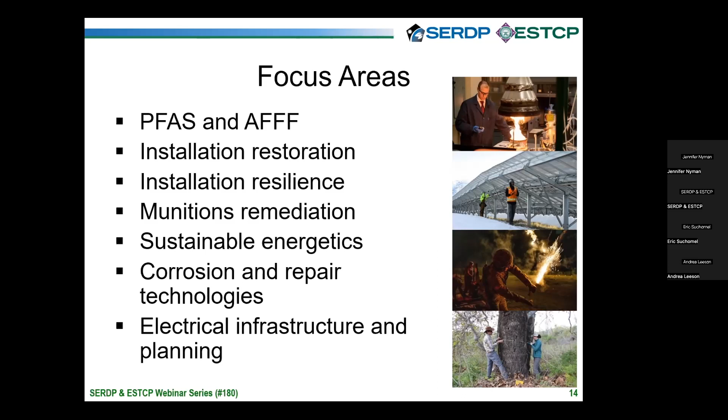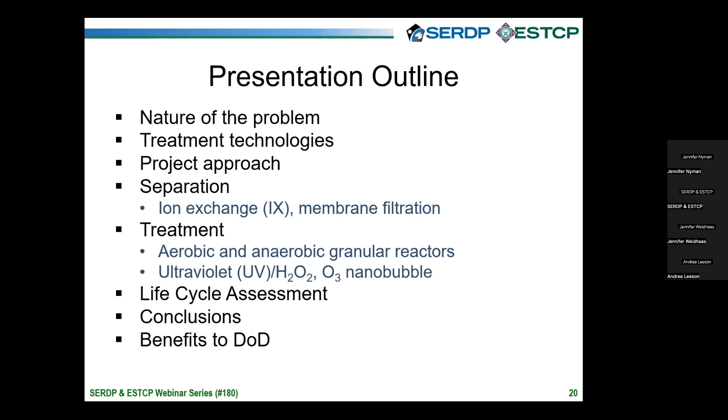And then I'll wrap that up by looking at the environmental impacts from these technologies by using a life cycle assessment. It's one thing to be in a laboratory and developing these really cool projects and proving it out at a pilot scale, but it really comes down to what is the cost of all those technologies compared to the baseline treatment that's currently being used, and what is the true environmental impact long-term from different technologies that you're selecting. Okay, so let's talk first about the nature of the problem.

Munitions wastewater can have a variety of different munitions in it, such as new insensitive munitions, such as DNAN, NTO, or nitroguanidine, in addition to what are considered to be legacy munitions, such as RDX or others. They can be in relatively high concentrations, up to or even half the solubility of some of these compounds. So for example, NTO is highlighted here because it is very highly soluble and also contributes a bit of issue with respect to pH.

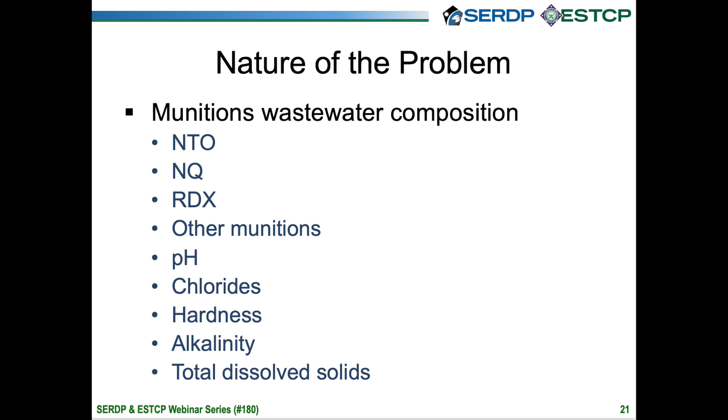So if you have a high NTO concentration in your wastewater, your pH is actually going to be down around 3 or 4. In addition, there is water that might be added to the system that comes from a domestic source. So if that domestic source, say river water or groundwater, contains high hardness or calcium or magnesium, that might foul some of your downstream treatment processes. Okay, so high concentrations of NTO is a problem.

On this next slide, I want to emphasize what some of the treatment goals might be. This is a picture from the Iowa Army Ammunition Plant NPDES permit. And I've highlighted in the lower right the concentrations of NTO that are allowed to be released on this version of the permit that goes through 2025. You'll note here that that facility is allowed to release only 1.1 milligrams per liter. So influent concentrations might be, say, 16,000 milligrams per liter, and you have to get it down to 1.1.

The other challenge that faces facilities when trying to deal with these wastewaters are the volumes of water that need to be treated. In some cases, there might be a certain batch that has some insensitive munitions as well as RDX. And then say 6 months or a year later, there may be a different batch of munitions that's being produced with a completely different constituent makeup. In addition, the volume might vary from no wastewater up to say a few tens of thousands of liters that need to be treated. So very variable influent that is kind of an exciting challenge for an environmental engineer to design, but from an operational standpoint might be a bit of a headache.

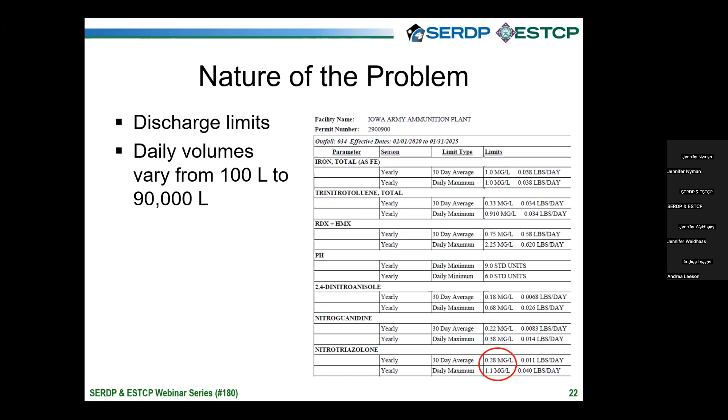Okay, so in thinking about how we would select a technology, given all those constraints that I just mentioned, here is some of the thought process that you might go through in selecting a treatment train. So if we start on the left-hand side of this diagram, I've listed out some of the available treatment technologies categorized by, say, what would be considered a mechanical, physical, chemical, or a biological process. This is not an exhaustive list of all the types of technologies that are available, but I present some here in each category as examples.

So under mechanical, you might be, for instance, trying to separate out one particular constituent that would slow down, say, a biological treatment process later on. So that's one of the examples and why we included both ion exchange and reverse osmosis in our study. You then might have a physical chemical process, say photolysis or ozonation, where you're actually now trying to target treatment of the separated munition compounds or other constituents that you're concerned about.

Okay, so after you've selected a variety of technologies, you then need to screen them out and decide, yes, this is an appropriate one that I want to proceed with at lab or pilot scale. Some of the considerations you might have are shown in the upper right, where you're looking at these selection and design criteria. So one of the key characteristics is how clean does that water need to be before I can release it to my receiving water or wherever it ends up. It might even be reused within the facility, as some facilities are interested in reducing their overall water footprint, right? So whatever that level is, whether it's an NPDES limit or other standard, that's probably one of your first criteria you're going to consider.

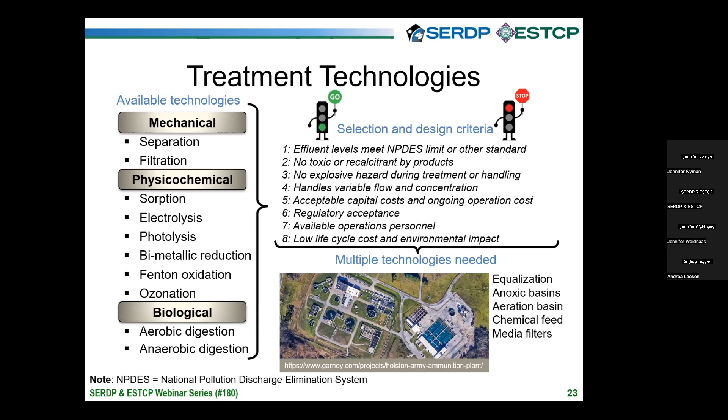Okay, so let's talk specifically about our project and what we ended up studying. This flow diagram is confusing, but I'll walk you through it. It's basically the influent comes in the orange box on the left hand, might have any one of these munition constituents in addition to things like perchlorate or nitrate, if those are also included in whatever formulation that facility is producing that day, or potentially even demilitarization wastewater.

And then the effluent in the blue box on the right-hand side is our goal, right? We want to be able to either discharge the treated wastewater straight to a receiving stream, or it may want to be reused within the facility. In the boxes are the different technologies that we studied. So we started by looking at different anion exchange processes, in particular because NTO was of concern to us because it may be in very high concentrations.

And we also looked at a membrane filtration system to separate out, say, the larger compounds such as RDX and DNAN from the smaller permeate compounds such as NQ or nitrate and perchlorate. And we then had various biological and chemical treatment processes that we evaluated for either the brine from the ion exchange backwash or the flow through or the permeate or retentate from the membrane. Okay, so let's get started.

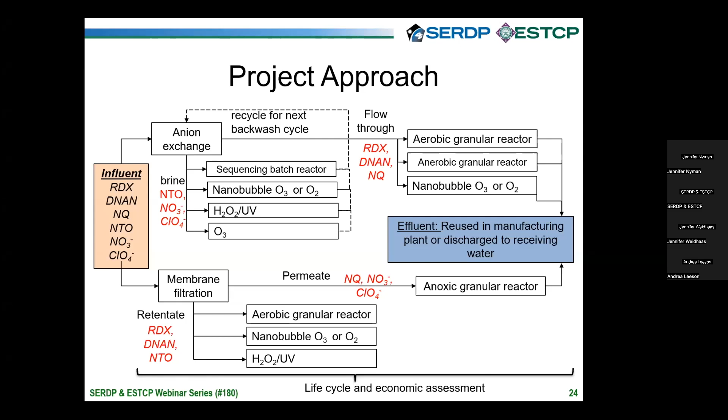I have just a few slides on each one of these technologies. We have a series of papers that have been published. I encourage you to email me or find it through Google Scholar, and I'd be happy to share those papers with you if you need more details.

So some highlights. Let's talk about the ion exchange technology. The argument for this being that NTO is an anion in most systems. It will be in very high concentration and could foul later biological treatment. So we were evaluating whether we could remove it from the wastewater and separate it from the other munitions such as DNAN, NQ, and RDX.

So the plot on the lower left shows you some batch studies that were conducted with 4 different ion exchange resins. These resins were selected because they are commercially available, they're used for water treatment, and they're also specific for nitrate or perchlorate removal. What we see here in the graph on the lower left is relative concentrations. A 1 being there was no removal of this munition in the ion exchange column, and a 0 being it was removed 100%. Oh, I'm sorry, the inverse of that.

So let's look at NTO on the diamonds in the second plot from the right on the lower left. What we see here is that NTO was completely removed in this ion exchange resin and all the resins we tested, whereas NQ was not removed at all. DNAN was variably removed, and some amount of RDX was exchanged on this resin.

We also see that in the plot on the lower right, some of the resins had a higher adsorption capacity for NTO than others. So for instance, the Purolite A532E won out in most of our systems and was used in our column studies.

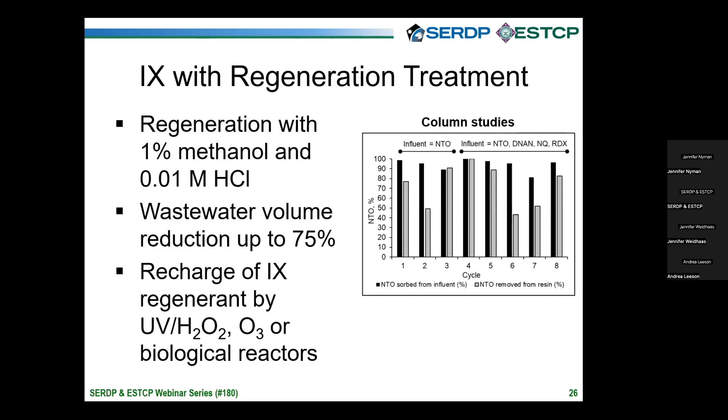So we're able to repeatedly load that ion exchange column and remove the NTO for further treatment. And additionally, we're able to reduce the overall volume of wastewater that needs to be treated that contains NTO by about 75%. But the permeate through the ion exchange column could contain, for instance, DNAN, NQ, and RDX, which needs to go to further treatment. And then the NTO that is removed from the wastewater and now in a concentrated solution also needs treatment. So some options available for treatment of both of those streams are in the next few slides here.

For IX brine regeneration, the plot on the upper left shows you the flow diagram. I have munitions wastewater coming in, which may require a pre-filter membrane if there are, let's say, some crystals of the munitions that have precipitated out as it flows through the treatment system because it's very high concentration. And then it would go through an ion exchange column, would be loaded with NTO within the ion exchange column, and then I'd need to regenerate it. So then treatment of that regenerate is what we're focused on here.

Some of the different technologies we explored for treatment of NTO in a brine solution are shown in the figure on the lower right. Again, we're looking at relative NTO removals. And so we see that certainly both a macro scale ozone and what's called a nanoscale ozone microbubbles are both very efficient at removing NTO when I have a relatively clean water, such as deionized water.

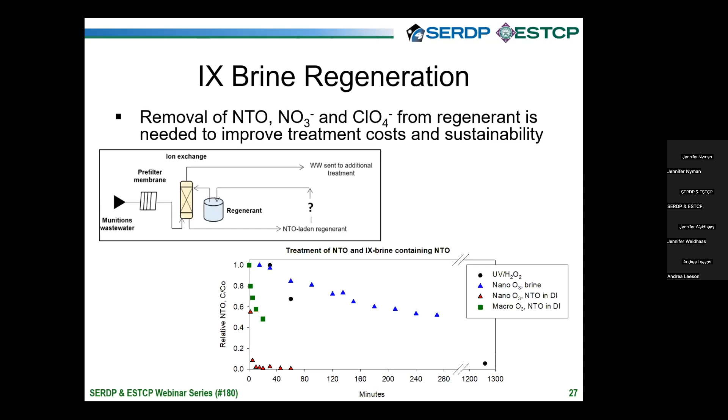When I add in things which might be present in the brine, such as that methanol, or I am adding in some complex salt solution for the regeneration, my degradation of NTO decreases, but I'm still seeing pretty effective removal of NTO. So I could theoretically reuse my ion exchange brine for regeneration of that column multiple times, which reduces the cost of the system and improves the sustainability of the system.

And so what were the conditions that we tested? Well, we tested influent wastewater that was a variety of pHs. So wastewater could be a pH of 3, could be a pH of 7, or maybe a little higher than that. And then sometimes you might have co or counter ions also present in that wastewater. So we did a series of tests where we added calcium and magnesium and some other chlorides, for instance, and nitrate to see how that affected the rejection. So NQ, when you threw in some very complex wastewater, we started to see reduced rejection in that system.

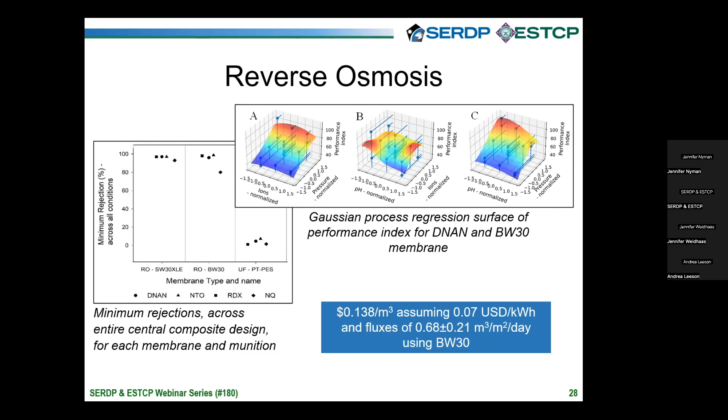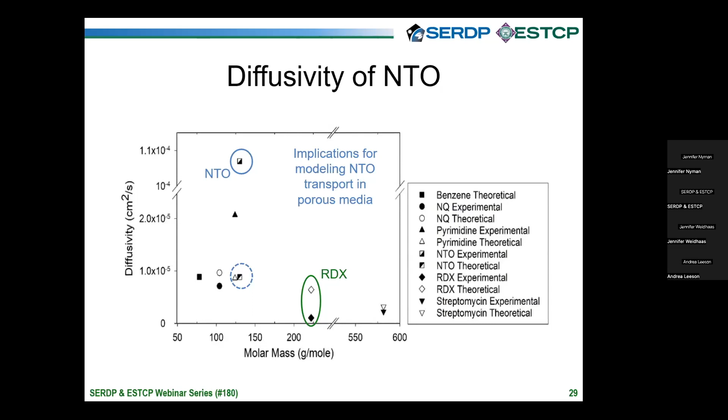Okay, one other quick thing I just want to mention, this is NTO and RDX diffusivity parameters. So NTO in particular, I want to point out here, because this does have modeling importance for those of you looking at groundwater transport of NTO. Hopefully it's not in the groundwater, but if it is, like we've seen for RDX, we want to be able to estimate the flow and transport of that. So we did some stop flow studies looking at NTO and other munition constituents.

And what we found was if you're using theoretical models to estimate the diffusivity of NTO, you might underestimate the diffusion of NTO through porous media, whereas our experimental results showed a much higher, order of magnitude higher diffusivity of NTO. So a cautionary tale for those modelers out there.

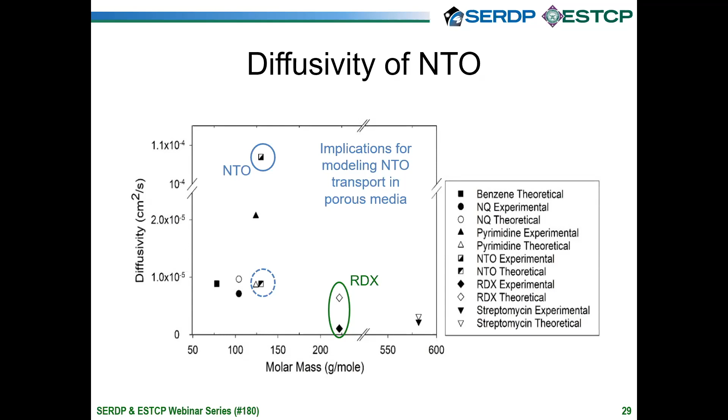Again, this is published. I'd be happy to provide the paper to anyone who is interested in knowing more details about it. Okay, let's talk briefly about the biological treatment systems, and then we'll look at the life cycle assessments for putting all these together.

Okay, so what's a granular reactor? This is sort of a new model of biological treatment systems. Most biological treatment systems are either a suspended single cell system, or you might have a floc reactor, similar to most municipal wastewater treatment plants, where there's a few bacteria that are sort of accumulated together. There's a little bit of sticky extracellular stuff that holds them together and allows them to settle relatively quickly.

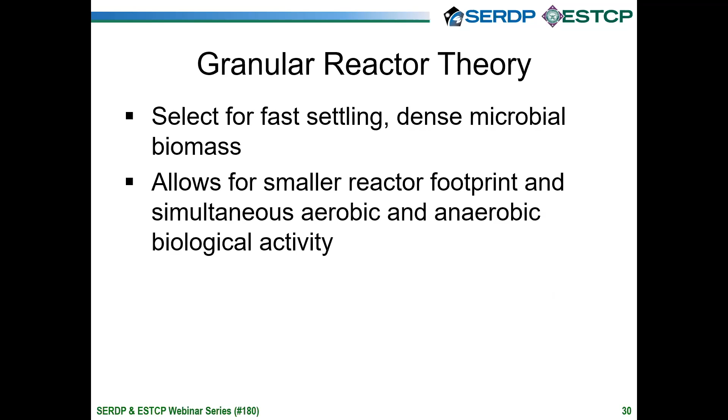Whereas a granular reactor is a very tight bundle of dense microbial biomass that allows for very rapid settling and also allows for both aerobic and anaerobic or anoxic treatment within one system. And because it settles quickly, it's a smaller reactor footprint and potentially more cost effective.

Okay, so an example of what the granules might look like are shown in the diagram on the left-hand side. So, the picture on the left-hand side shows two graduated cylinders. The one on the left-hand side is a standard activated sludge floc-based system that you might see in a municipal or domestic wastewater treatment system. They settle, but they take maybe an hour, half an hour to reach settling.

In contrast, the graduated cylinder on the right-hand side of that figure shows you very large granules that are on the centimeter size. These things settle extremely quickly and are very dense. So the theory is, in the figure on the lower right, that you would see, for instance, NTO or nitrate on the exterior that might be treated aerobically if I'm pumping air through the system to keep the floc suspended.

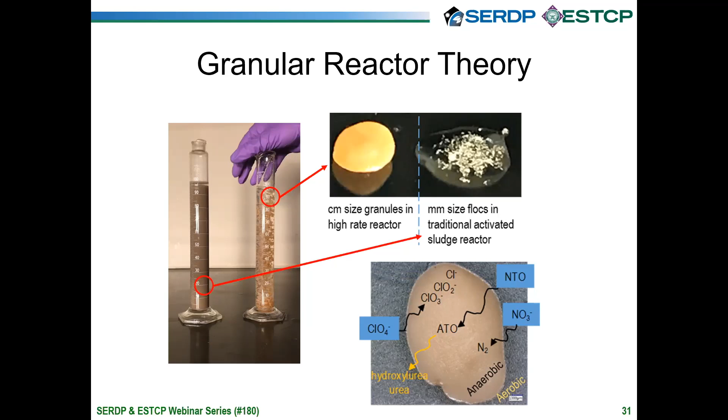But on the interior of the granule, by diffusion, NTO or its degradation products would diffuse in the interior of the granule. It might then be anoxic or anaerobic conditions on the inside, and you might then continue to get anaerobic or anoxic degradation on the interior of the granule. And the degradation products would diffuse out just by chemical diffusion processes.

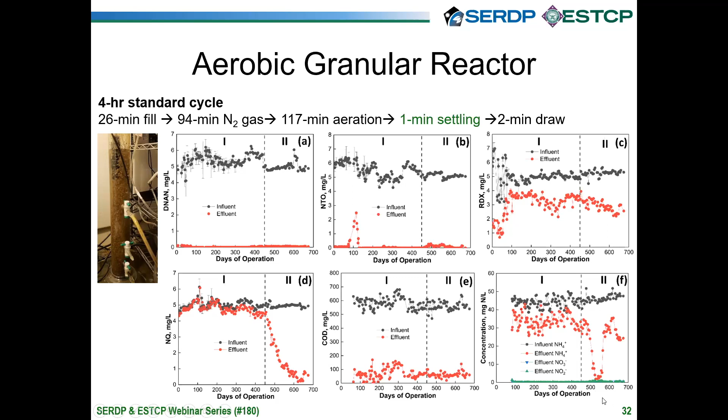Okay, a little bit about specific degradation products. I'll go over this quickly. Again, it was published in a paper. I'd be happy to provide that to anyone who wants additional information.

The take-home message is that DNAN, we did see it reduced to MENA and DAAN, and some production, based off of the LCMS mass to charge ratios, of these dimers that have been reported in other literature. We also saw, as has been reported in other literature, degradation of RDX down to TNX. One thing that is sort of novel about these results is we saw degradation of NQ stoichiometrically to this nitrosoguanidine.

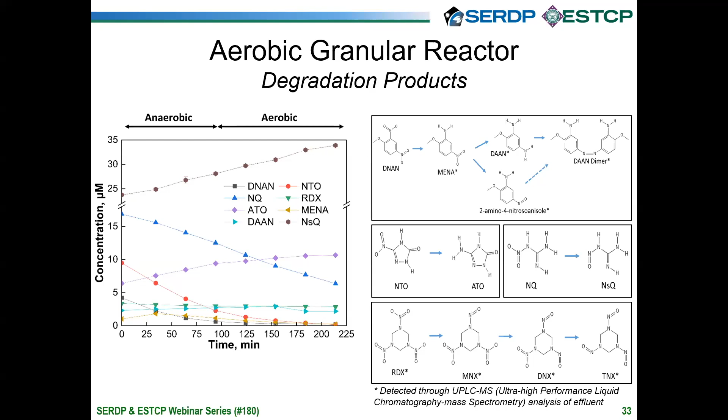So that's ongoing studies within our lab. We're trying to figure out if there is more mineralization of those compounds. And I point out mineralization because of the results that we see here on this plot. I apologize, these are small figures, but there's two main points I want to point out here.

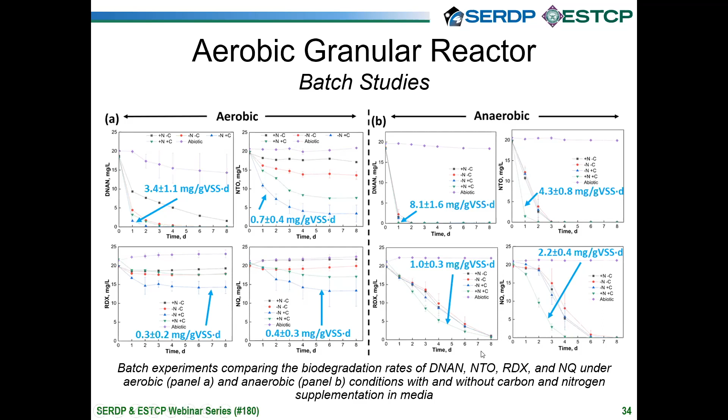So in this case, the munitions are the only thing present in the treatment systems. They weren't mixed together. So all of the degradation was faster under anaerobic conditions. The rates are shown in the blue, milligrams per gram volatile suspended solids per day, in each of the plots on the right-hand side. And interestingly, all of these munition constituents could serve as a sole source of carbon and nitrogen under anaerobic conditions. So very interesting, and I think worthy of additional investigation that is ongoing in my collaborator's lab, Ramesh Goel.

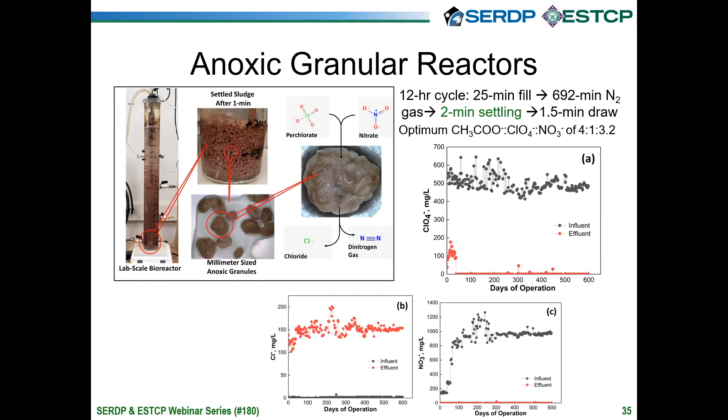Okay, and just real briefly on these anoxic granular reactors, this is another study that we did. In this case, they were anaerobic. Interestingly, we were concerned about these granules staying together because methane could potentially have been produced on the inside, or other gases that would cause the granules to break apart. And we didn't see that, which was very exciting. And we did also see significant degradation of perchlorate and nitrate in these systems that was sustained over 600 days of operation.

Okay, so let's look holistically now at all these technologies that I presented. We wanted to do a life cycle assessment to step back and say, what is the real impact from these technologies, right? And so for those of you who are not familiar with a life cycle assessment, this is really doing a systematic analysis of potential environmental impacts from any product or service. In this case, we were looking specifically at munitions wastewater treatment trains.

So this process allows us to do an analysis of all stages of the treatment technology, including production of the raw materials, such as the resins or chemicals used in the reactors. We also can look at distribution or movement of those goods and services to different parts. Like, did we order something from somewhere in Europe and it had to be shipped to our facility in the central United States? We can look at the use of that system, whether it's 6 months or 10 or 15 years. And then we also consider the end of life, right? As this is deconstructed and we dispose of it, what is the impact associated with that?

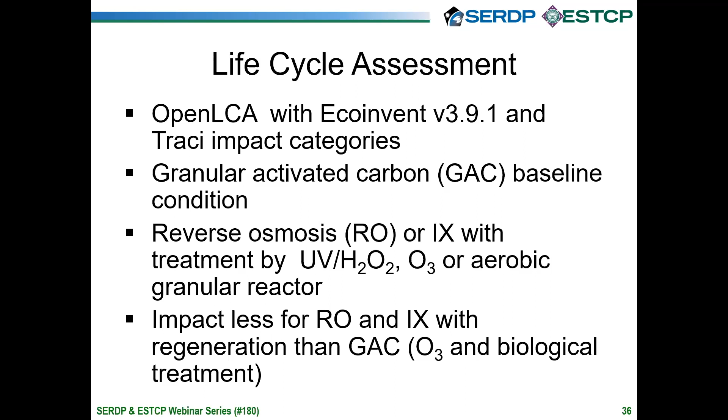So how did we do that? Well, we used the OpenLCA software. We purchased the EcoInvent database that has all of these different impact categories for multiple different processes or products that helped inform our life cycle assessment. And our baseline case was really comparing all of the technologies that we've looked at to granular activated carbon, which is used at some of these facilities for industrial wastewater treatment. Okay, so let's look at our plots here.

The plot on the left-hand side compares granular activated carbon to ion exchange with treatment either by a granular reactor or ozone, UV, etc. And the plot on the right-hand side compares granular activated carbon to reverse osmosis. The categories along the x-axis include the various environmental impact categories from all different phases of the system. So acidification might be, is there a pH adjustment due to acid rain or release to a wastewater, for instance, from production of materials, from use of the materials, from end of life, etc.

The horizontal lines basically represent how long that technology would need to be used until it had less environmental impact than granular activated carbon. So for instance, ion exchange on the left-hand side shows you, in the worst case, how long it would take until ion exchange was less environmentally impactful than granular activated carbon. In this case, it was 13 years. In the case of RO, it was 4 years.

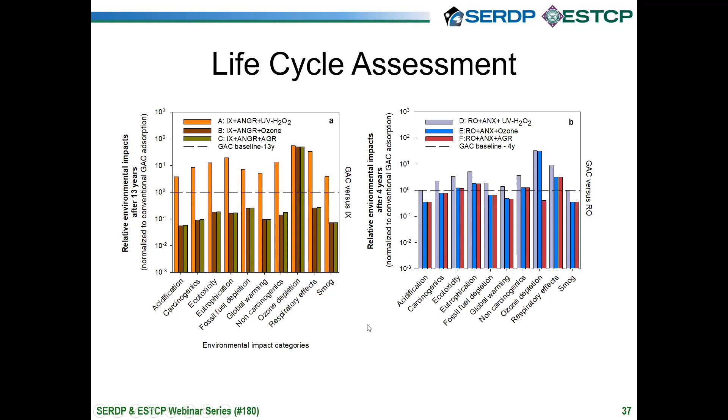So the take-home message is if you're looking at different technologies, it's more than just the current cost for purchasing the material and putting it in place. These environmental life cycle assessments are also handy for figuring out how long until the environmental costs come down to be reasonable. And you can also argue which one of these particular environmental impact categories you might be most interested in. For instance, global warming may be something you're very interested in, and you're perhaps not as interested in ozone depletion. It allows you to look at different phases.

Okay, so wrapping up here, we found that both IX and RO are effective at segregating these insensitive munitions from wastewater. Brine regeneration does increase the sustainability. Granular reactors are probably faster than some other floc-based biological treatment systems. And then these treatment trains in some cases do have a lower life cycle cost than granular activated carbon.

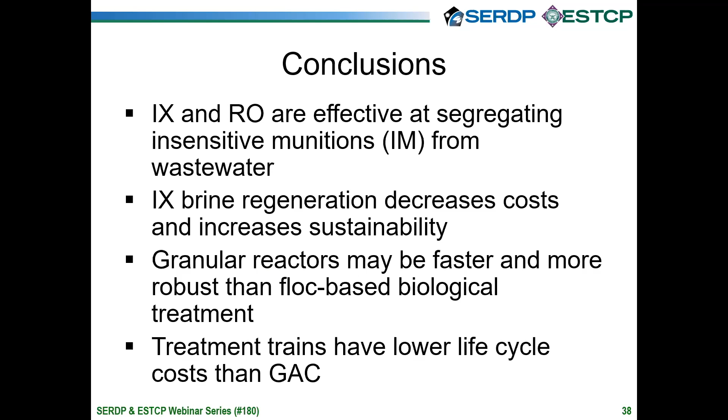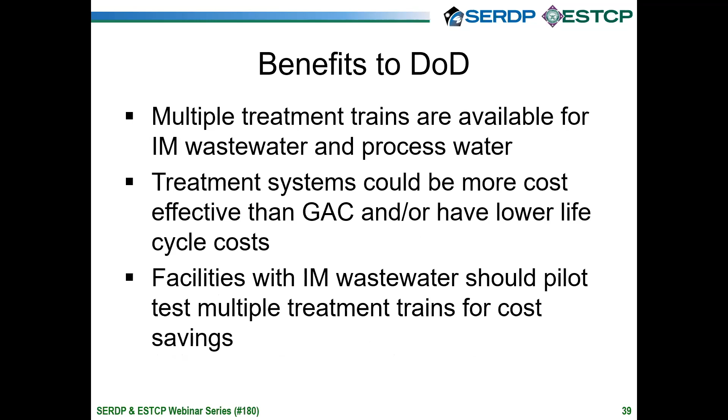So what are the benefits to DoD, right? There are multiple treatment trains that are available for IM wastewater and process water treatment. Many of these should be piloted at real facilities, take them out of the bench scale and go investigate at these facilities. And I do highly encourage a consideration both of the cost, but also the life cycle cost of all of these technologies.

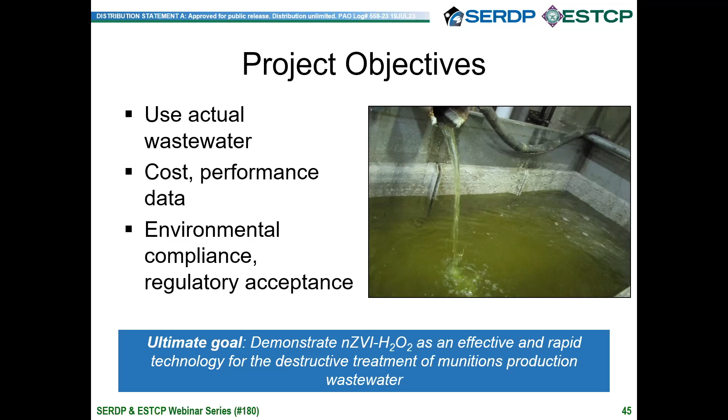Our site: we performed the pilot demonstration in our laboratory here at Picatinny Arsenal. We have a robust pilot system that meets operational construction requirements required for energetic and explosive production within the industrial base. We executed a batch treatment system using tank reactor 1, and we had the opportunity to dose and add in our supporting chemicals here.

But what are some of the issues with the IMX wastewater? As Jennifer mentioned, there's two explosive formulations recently fielded within the last 15 years or so. The first, IMX 101, contains dinitroanisole or DNAN, nitrotriazolone or NTO, and nitroguanidine. The second formulation contains DNAN and NTO, and switches out the nitroguanidine for RDX. These explosive fills were transitioned for mortar and artillery applications in ammunition end items. The chart on the right highlights that some of these new or emerging IMX constituents are extremely more water soluble than their historical or legacy counterparts like TNT or RDX.

And from some of the earlier production campaigns and low rate initial production campaigns, our colleagues from the industrial base realized that the existing or status quo wastewater treatment technologies weren't necessarily suited for these new and novel formulations. They found out that the incoming or influent waste streams were significantly more acidic than TNT and RDX waste streams, about 3.2 on the pH scale, and they were yellow in color compared with TNT wastewater, which you may be familiar with as pink water. We were also learning about infrastructure impacts due to the low pH of the wastewater. We were seeing pumps or piping components within the wastewater conveyance systems failing at a significantly faster rate, not meeting their intended lifetime compared to when they were processing conventional waste streams.

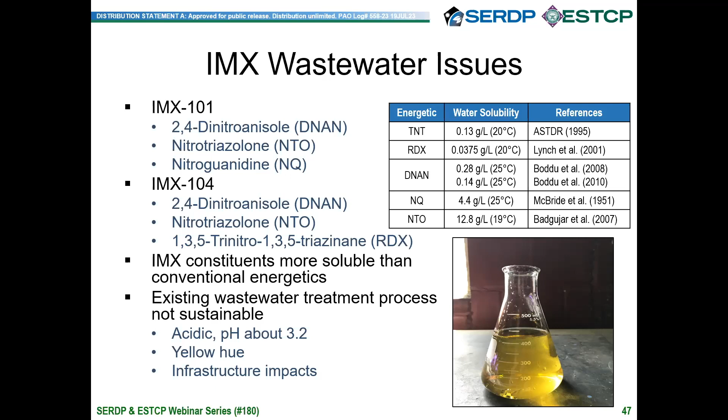So our nano iron peroxide technology is a two-stage process. First, we introduced the nano iron to the influent waste stream. We observed, and I'll describe further in a few charts, rapid and complete munitions constituent degradation. The zero valent iron was converted to ferrous iron particles, which further spurred and catalyzed the Fenton oxidation reaction. And then from there, the ferrous ion, as part of the Fenton oxidation process, was converted to ferric. So we were using the nano iron for multiple functions within our two-stage process: first reduction, followed by the oxidation of the daughter products, and ultimately to promote settling.

So initially, we performed a market study and obtained 4 different nano iron materials. We evaluated them in an anaerobic glove box against individual munitions constituent synthetic waste streams for NTO, NQ, DNAN, and RDX. All were found to completely degrade these MCs within a 10-minute time and at a low pH of approximately 2. However, we down selected the Nanofer STAR product for use in our pilot demonstration due to ease of use, shelf life, and safety and stability concerns.

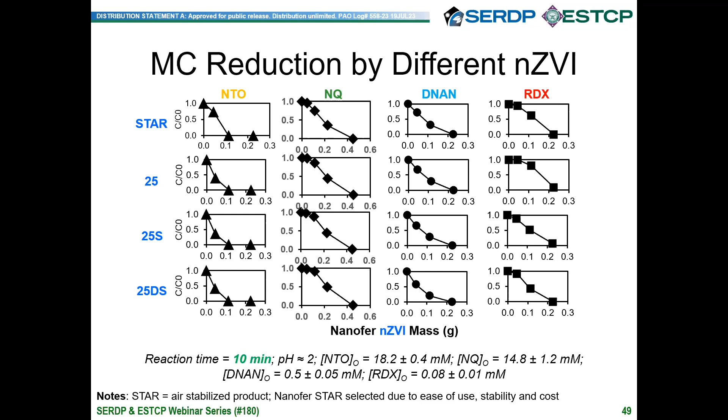So from there, after we completed the anaerobic glove box studies with 20 milliliter volumes of the wastewater, we scaled it up in the laboratory at the University of Delaware using an intermediate reactor, about 3 to 5 liters, with synthetic wastewater. Once we were confident in the results there, we further scaled it up in our intermediate reactor with actual IMX 104 wastewater, which is increasing the concentration by about a factor of 78, or close to 80. And once we were satisfied with the results there, we took it to the ultimate scale up at our field demonstration facility at Picatinny Arsenal. So throughout our ESTCP project, we successfully scaled the technology by a factor of almost 1900, or nearly 2000 times volumetrically, and about 80 times in concentration.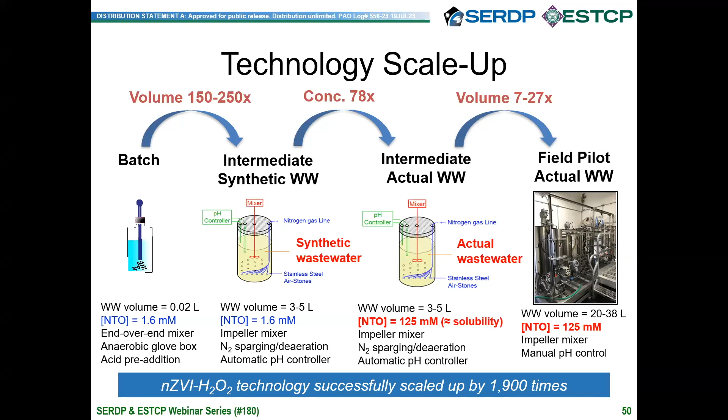So what were some of our results from our field demonstration? Over about 2 years, we conducted 7 field trial demonstrations up here at Picatinny Arsenal. Results from the first 5 demonstrations are captured here. We observed rapid, complete removal for NTO degradation, its daughter product ATO production, and its subsequent degradation. The NTO completely degraded within a 10-minute reaction period, and we saw good formation of amino triazolone, or ATO, and then its subsequent degradation within 60 minutes.

Throughout our pilot studies, our goal was to do the complete reduction and oxidation cycles within a 60-minute cycle period, but we were seeing that everything was gone within 60 minutes. So throughout our pilot studies, we tried to stress test the technology even further and complete the reduction and oxidation cycles within a shorter time frame. And we were able to accomplish that within 30 minutes by the time of our 5th trial.

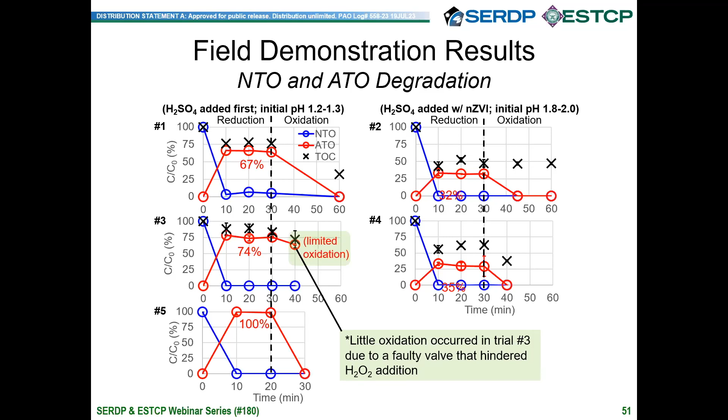So some of our RDX and DNAN degradation, similar results. Complete degradation of RDX and DNAN also within 10 minutes, good mass balance formation, and followed by the degradation of diaminoanisole, the primary DNAN daughter product, also within about 40 minutes by the time we became more familiar with the pilot operation.

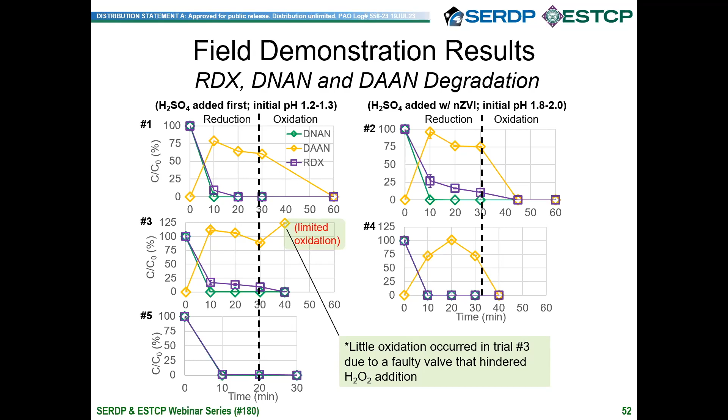And similar results from pilot trials 6 and 7, munitions constituents were gone within 10 minutes. I'm not sure what happened there in our pilot trial number 6 with the NTO, but within 30 minutes, we were not seeing any appreciable concentrations of the munitions constituents or their primary degradation products. And also in the plot on the far right-hand side, we were seeing about 2/3 degradation of the total organic carbon just throughout this 30-minute period.

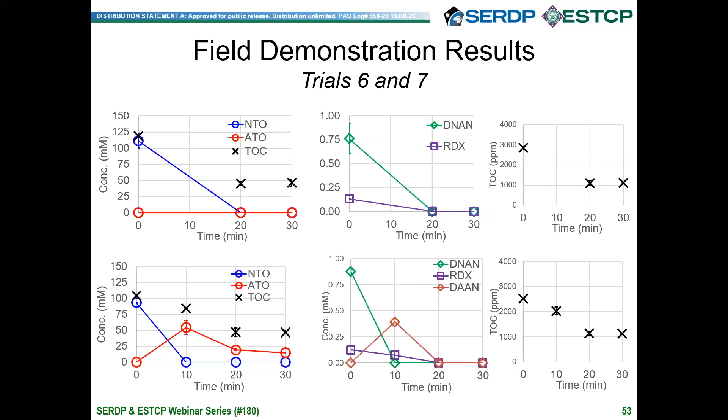So even though we were tracking the complete degradation of the munition constituents and their primary intermediate products, the ultimate end product or nitrogenous end product that we were observing was ammonia. Highlighting, we did have a little bit of mechanical error with our pilot system on pilot trial number 3, so that data is kind of an outlier. But we're seeing good conversion of the munitions constituents, complete degradation to ammonia.

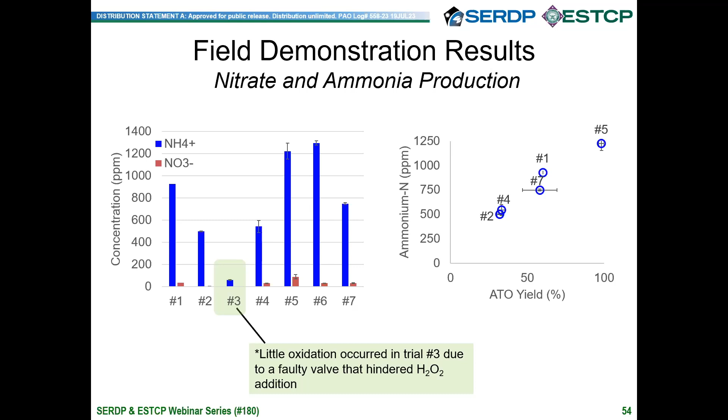We also evaluated the possibility of adding polymers to the wastewater after the oxidation step to see if there might be an opportunity to further enhance settling. Our team at the University of Delaware evaluated 10 polymers in total, and the best performing polymer was a Nalclear 8181. It did enhance the solid settling rate somewhat, but if we were going to take this technology to an industrial base facility or scale it up for full scale implementation, could certainly consider it, but maybe cost impacts with adding this additional chemical.

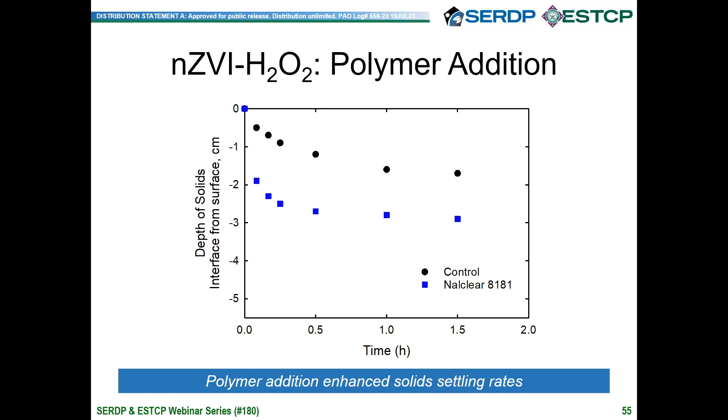But we also are cognizant that the nanoiron peroxide process generates solids after the Fenton oxidation reaction. So we wanted to evaluate if there's options for sludge dewatering or recommending a scale up of a belt filter press for future design and scale up considerations. We worked on some crown press tests in the laboratory at Delaware, and they found that this crown press process was effective in separating those solid residues from our clean munitions constituent effluent. And this data could be provided or transitioned to engineers within the industrial base to further design or procure a sludge filter press.

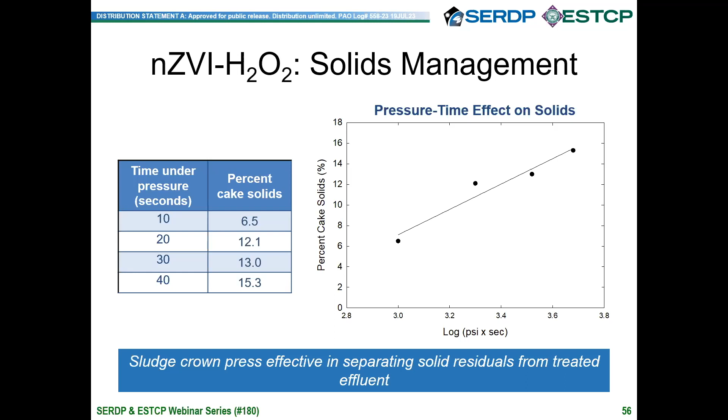We also evaluated the toxicity. We did an aquatic toxicity test in the laboratory on the raw pH adjusted wastewater that contained the IMX constituents, and found that there was an improvement compared to the influent wastewater. Also, as Jennifer described earlier, we also noted that the NTO was the primary driver for causing toxicity in our IMX 104 waste streams that we evaluated, and there may be opportunities for further improving the toxicity results in the effluent of the nanoiron Fenton process by targeting NTO upfront and early.

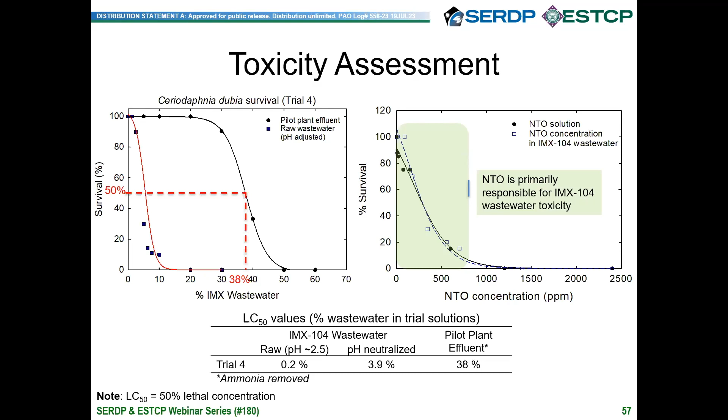So I don't think that there's a silver bullet for evaluating these process waste streams. And some of the potential issues and concerns that we've identified throughout our ESTCP project is that we did notice there were variable munitions constituent concentrations. We were sampling from a larger reactor that was in a non-temperature controlled building, so it was subject to the atmosphere. And we'd noticed that in the winter, when we'd go to sample, the munitions constituents were lower due to precipitation or solids settling out. And in the warmer months, when the building was warmer, we'd see more of those solids dissolved and have higher influent concentrations.

Something that we were also cognizant of is the source of the nano iron. It's a foreign source material, and cost to ship it to the United States could become a concern, especially with all the supply chain concerns that are taking place within the DoD and the United States recently. And then you also want to be cognizant and work with stakeholders to manage the sludge and solids that were generated as part of this process for any future scale-up considerations.

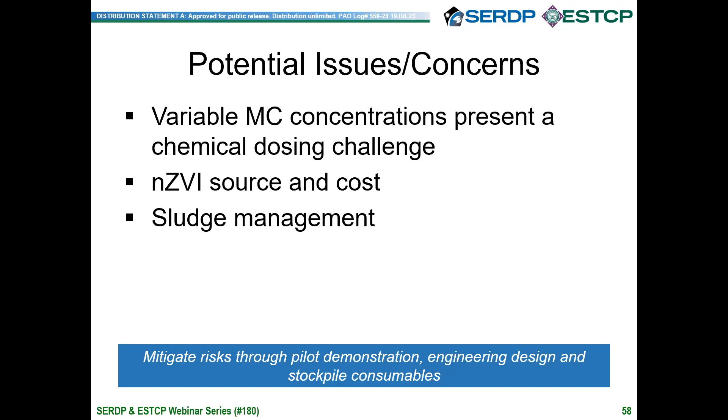So in conclusion, those IMX munitions constituents are much more acidic, driven by the NTO, and significantly more water soluble than the legacy explosive compounds, which does pose a challenge with applying older technologies that have been in the industrial base for 70 plus years, or since World War II, with those new emerging energetic formulations that have only been fielded for about 10 or 15 years.

We think that it is possible to integrate the nano iron peroxide process into production footprints. It's kind of a crock pot treatment method, if you will. If you have a large enough batch reactor and some additional pumps to dose the consumables, then we think it could be a candidate for your production process. We did demonstrate that there is also reduced toxicity compared to the influent IMX waste streams following this process.

And then lastly, we'd also definitely want to be cognizant of safety concerns for transitioning this or other emerging technologies to the defense industrial base, ensuring that there's no pinch points for explosives to get trapped in pipes or flange fittings, and also make sure that it's safe for the operators, as examples.

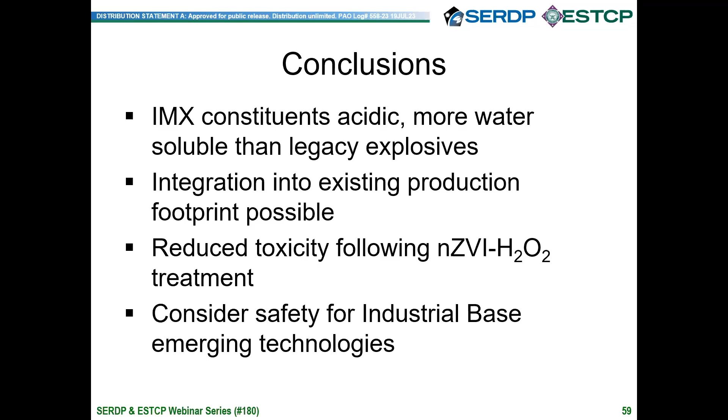Some of the benefits of this technology to the DoD that we've confirmed throughout our project: it's fast, it's very rapid. We're seeing complete degradations of high concentrations of actual waste streams within minutes, compared to some of the status quo technologies within the industrial base that could take hours or multiple production shifts to treat a large volume of wastewater.

It's destructive. We're degrading those parent munition compounds into innocuous products, first their daughter products, and then to the nitrogenous products that are more amenable to subsequent treatment technologies or biological treatment before ultimate discharge, or potentially even reuse within the manufacturing process. We believe this technology is rather simple and robust. We add some iron, the acid and the peroxide, let it react for a period of 30 minutes to an hour, and we have clean water come out on the back end.

And also this technology is rather scalable. We started out at the beginning of our project honing the kinetics in an anaerobic glove box on the 20 milliliter scale. And over the course of about 2.5 years, we took it from that scale to a 10-gallon pilot reactor at Picatinny Arsenal, about 2,000 times volumetric scale-up.